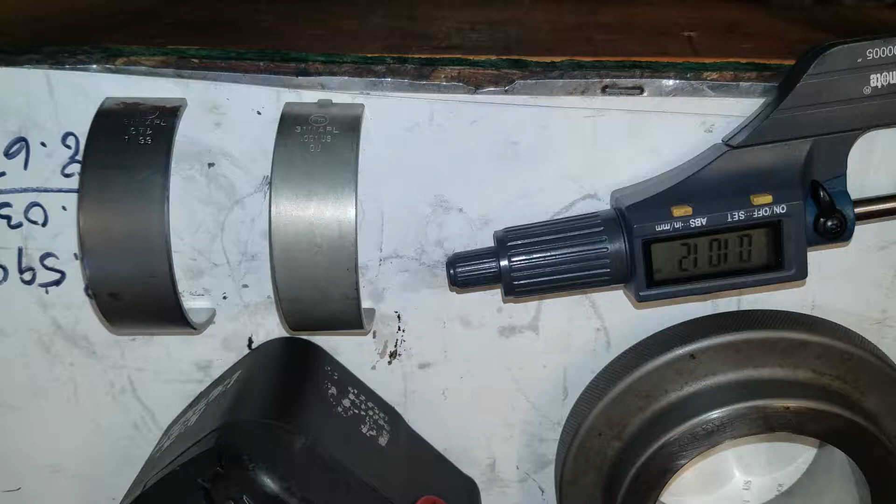Okay, this morning let's talk about one-under bearings. The bearing on the right is a standard bearing. The bearing on the left is a one-under bearing.

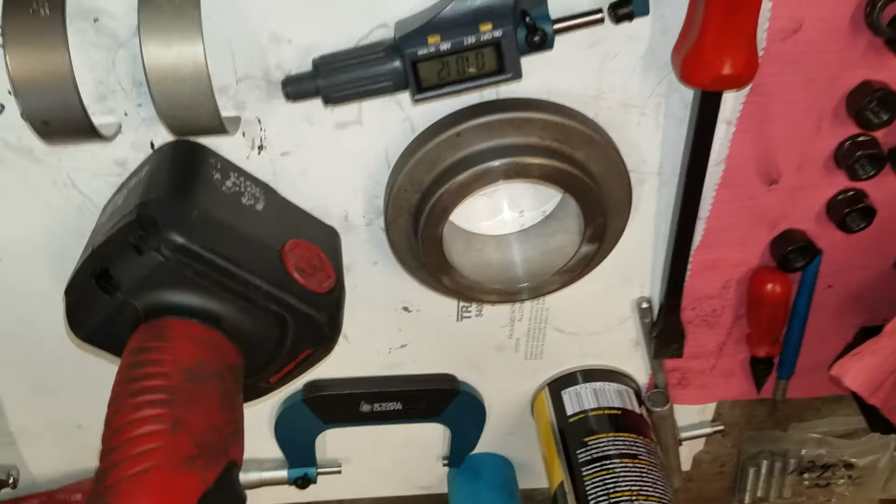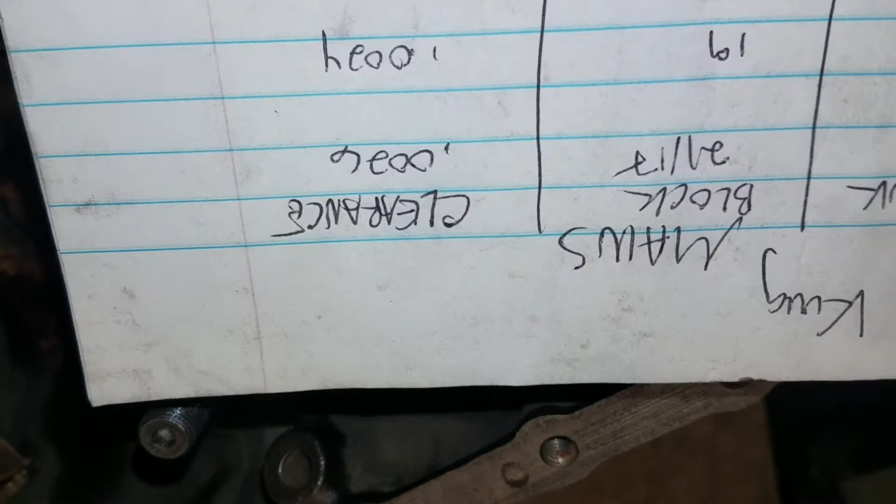One-under bearing is generally a little bit thicker than a standard bearing. Of course, we're talking here in 10,000ths of an inch. It should be 1,000th of an inch thicker if you use the whole bearing, hence the name one-under. But if you use a half a shell, then that's a half a thousandth, or 5/10,000ths. Based on my measurements last night, I am looking for a half a thousandth would be beautiful. So let me measure these bearings.

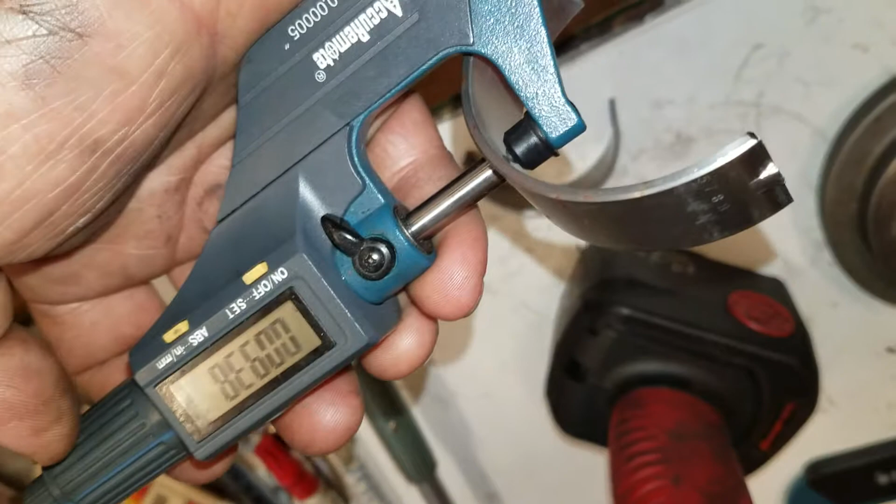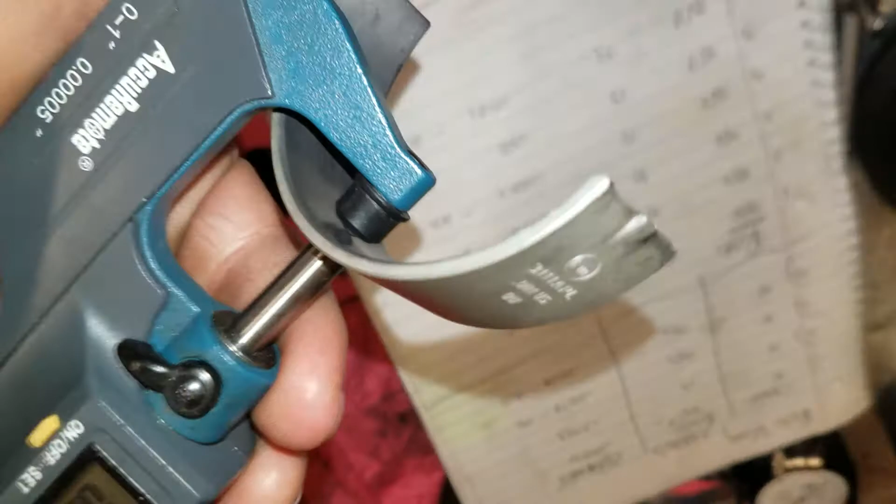All right, here we have the bearing that was in it, which is a standard bearing, and it measures 938. Here we have the bearing that I'm going to put in it, which is 941.5. Now if you look at the decimal places, we're really splitting hairs here, but splitting hairs is what the stack up of tolerances will get you.

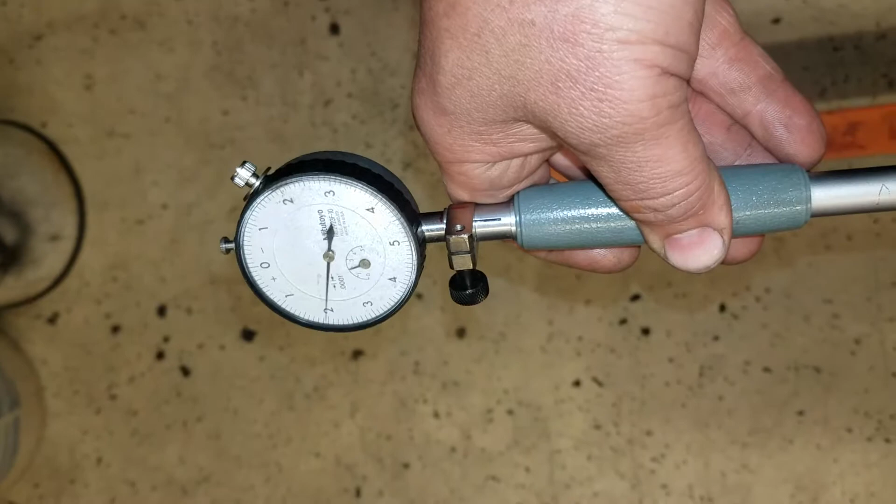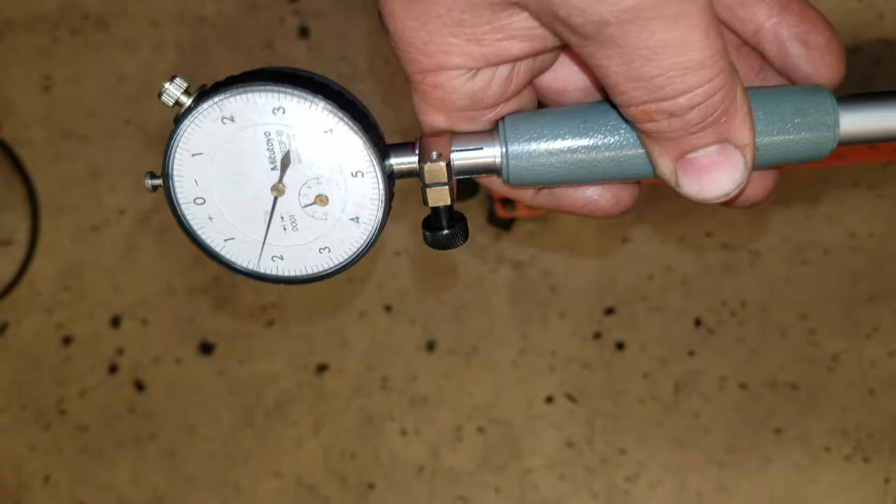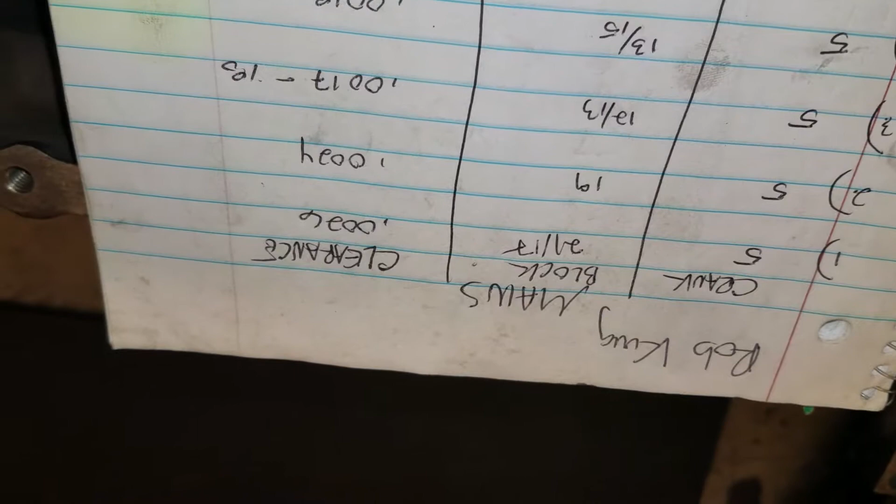So before we had 21 and 17 on the other half. So we go to 16. So basically we've gained 5/10,000ths thicker. So 5/10,000ths thicker now makes us 21 instead of 26.

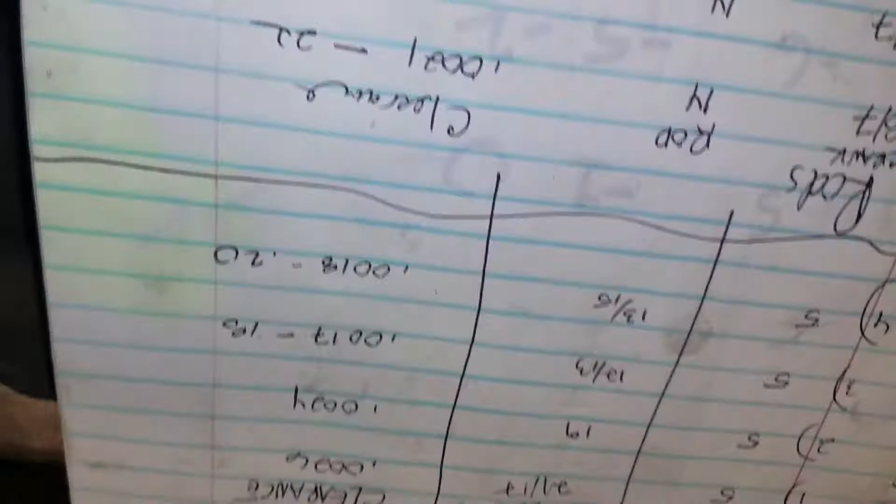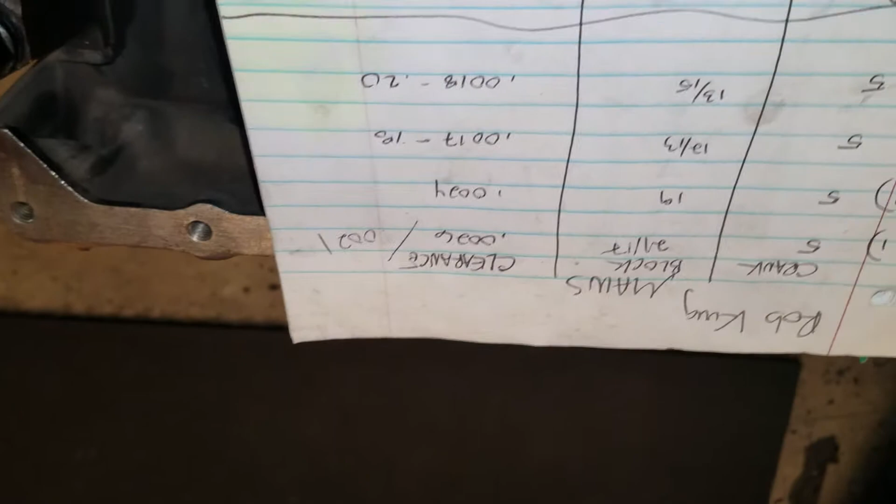And when you're building a high performance Buick V6, I like that number a little bit better. Would it live at 26? Probably, but if I can get them closer to 2, generally it's 18 and 22 is the range.

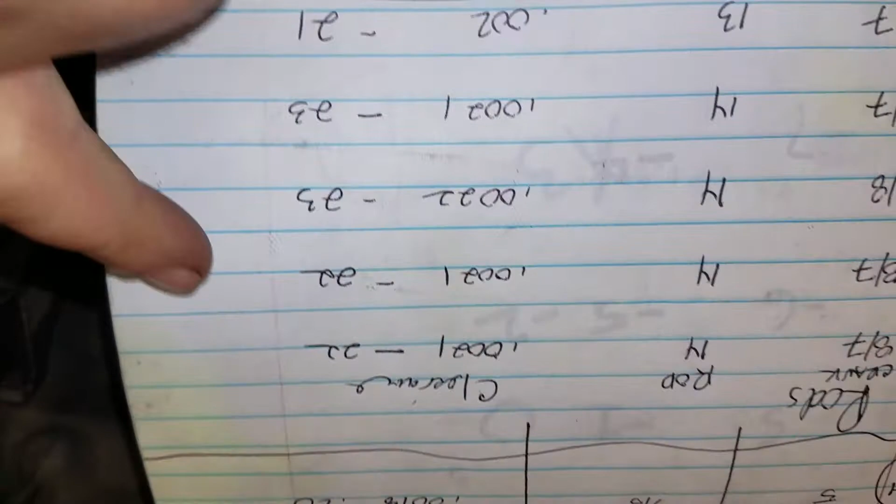And you can see I'm right here, I'm in it. There I'm in it, just a little skosh tight. And there I'm in it. So I'll do the same thing to number 2 and tighten that up a little bit.

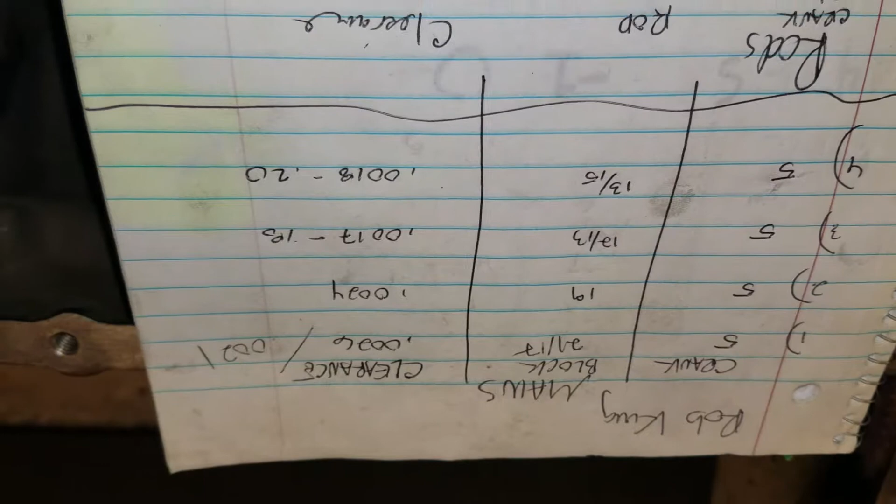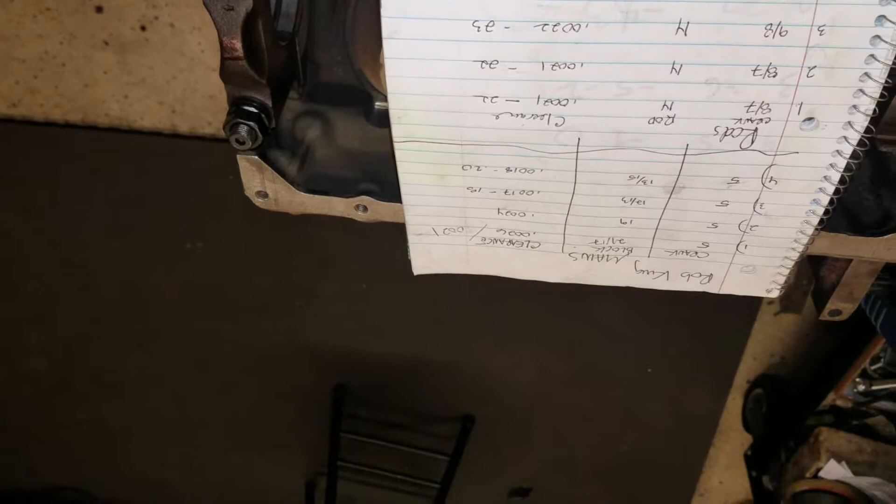But that's how you use one-under bearings. They come in mains, they come in rods, they don't come in cam bearings. They also make a HX bearing, which sometimes you use on these Chinese cranks, which are fat.

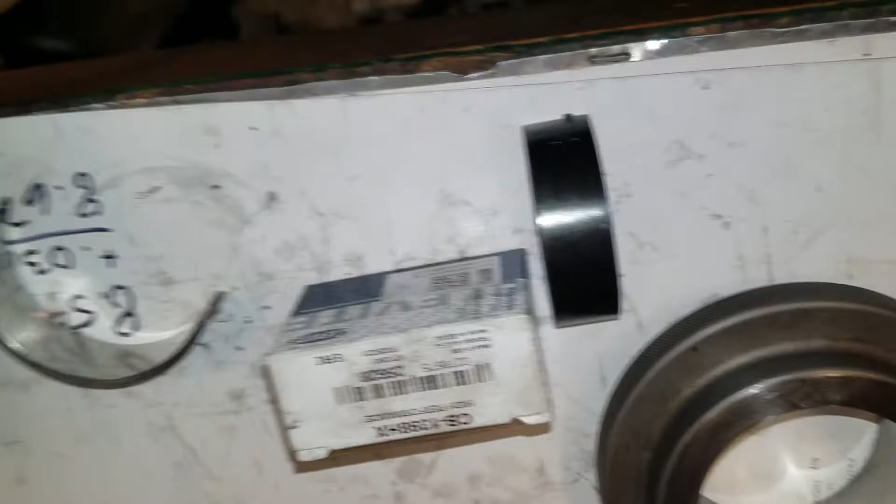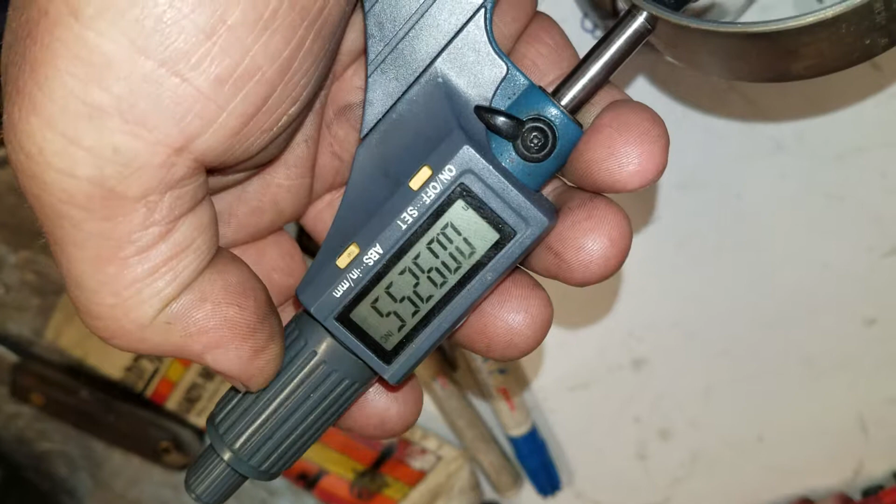As I said, they make HX bearings. 1398 HX is the HX rod bearing. And here's the HX main bearing. I don't have any complete sets of main bearings, HX main bearings. Usually we just slide them in there, 1 or 2 shells as needed.

But there you go, it's 925. The original bearing was, I want to say, 938. And the one that went in there, well, I want to say was 941.5. So this one's 925, so this one is significantly thinner.

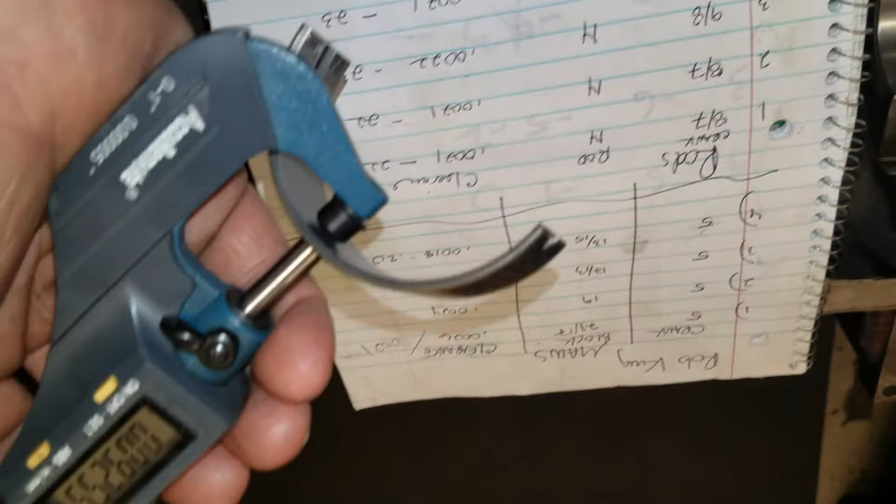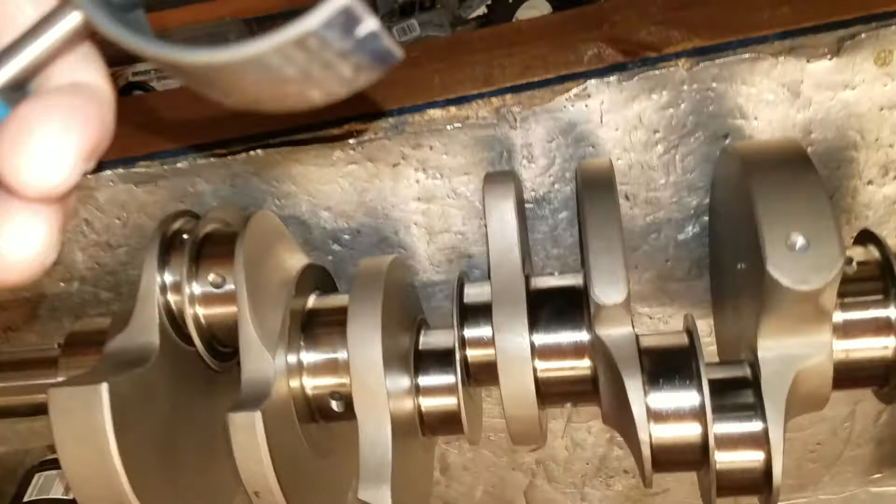So if my clearance was too tight, like .001, whatever clearances you desire to have in your motor, this is a solution. Another reason these are helpful, usually not on a stock cast crank would you ever need a HX, but on a Chinese crank, sometimes these journals are a little fat. So in lieu of turning it down 10 under, as long as the journal is straight and there's no taper on it, HX bearings will help you deal with a fat journal.

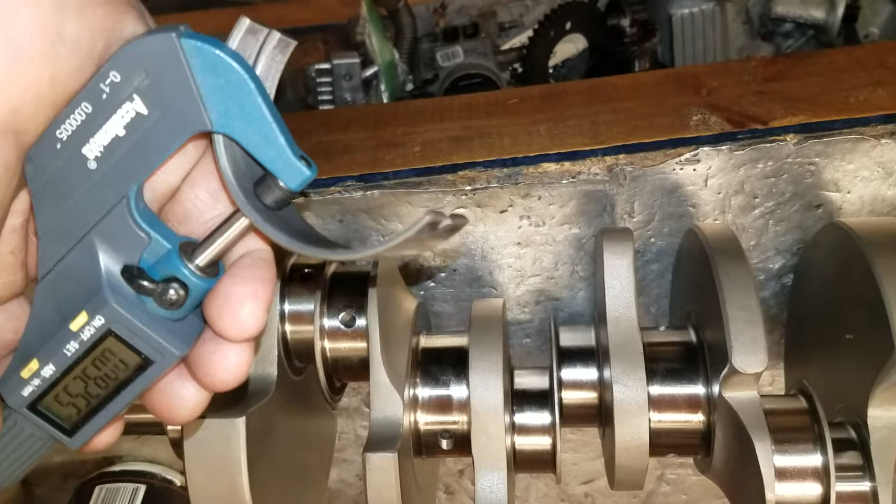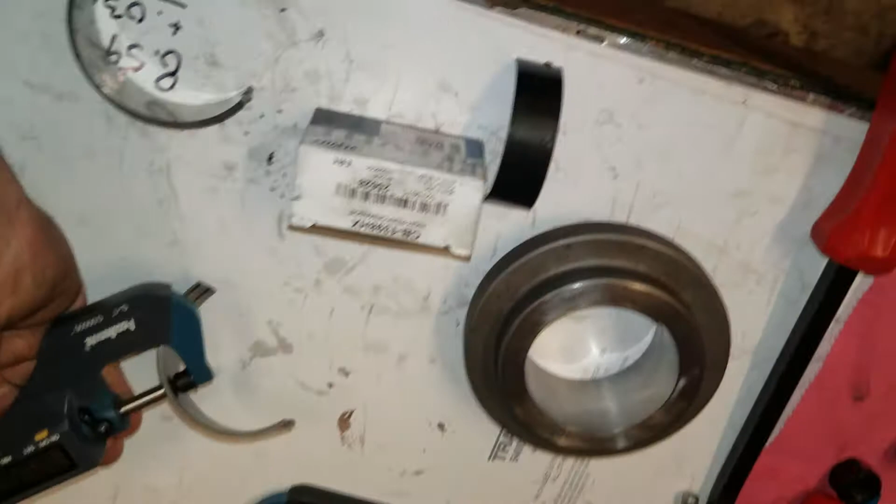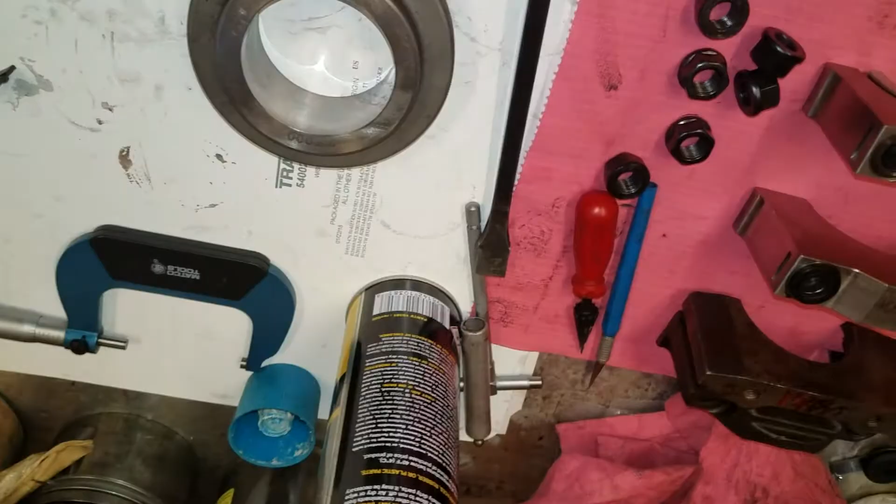So standard, one-under, which is thicker than standard, and HX, which is thinner than standard. Now I will caution you, HX bearings are expensive. They're not made by all bearing manufacturers, as this one is made by King. These are made by Clevite, Mahle, whatever you want to call them. And they are a necessary evil sometimes in a high performance engine.